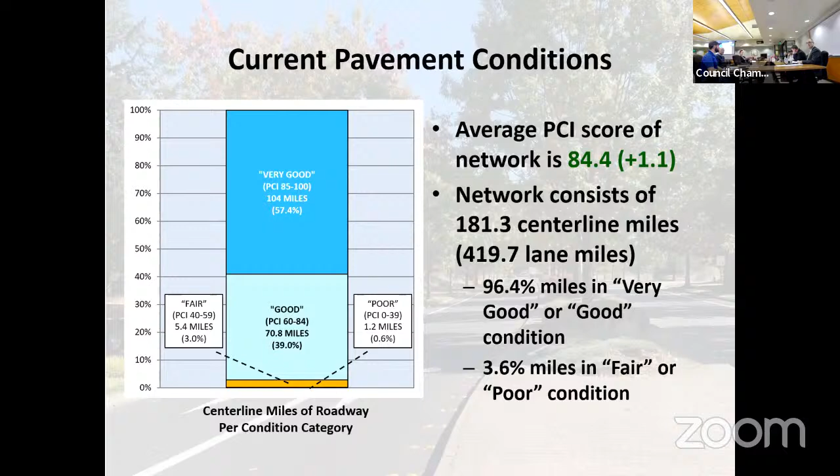Our network currently consists of 181.3 centerline miles, 419.7 lane miles. 96.4% of those miles are in very good or good condition, and then 3.6% of those miles are in fair or poor condition.

Here's a chart that shows our pavement condition over time. Generally, it's hovered between 83 and 84. So our funding, our treatments, our programs, adding to the network has buoyed it a lot, where we bring in these new neighborhoods and obviously they come in at 100. So all of these new streets buoy it, which also you have to maintain. So it brings that number up, but down the road it may end up bringing the number down if you don't adequately treat them or adequately fund your network.

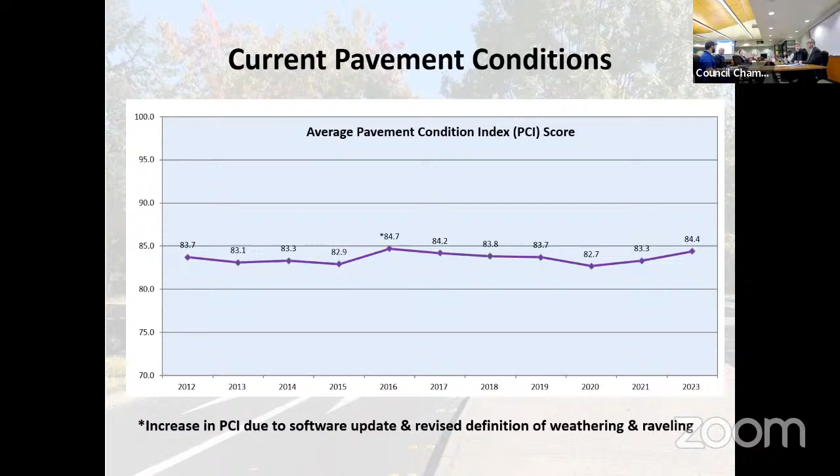Can you talk about the footnote here? Yeah, in 2016 we used a program - well, we used it forever, but Street Saver updated and combined raveling and weathering into one. In doing that, it separated out where the more you put into weathering, the less impact it had on PCI. When they were combined, if it had a little bit of weathering - which is considered a little bit less severe than raveling, where raveling is a lot of material loss, and weathering is just Mother Nature working at the fines on the surface - until you get to a high grade of weathering, it really doesn't have that much impact on your PCI. So it's just the split of that.

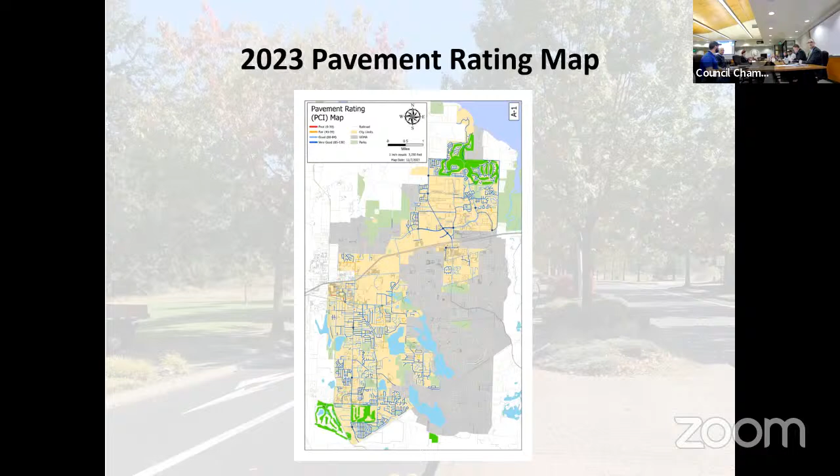Here's the map for the city. You can find it in the report itself on map A-1. The thing to note about the map is there's very minimal yellow and red in our network and a lot of blue, which is what you want to see. We see blue.

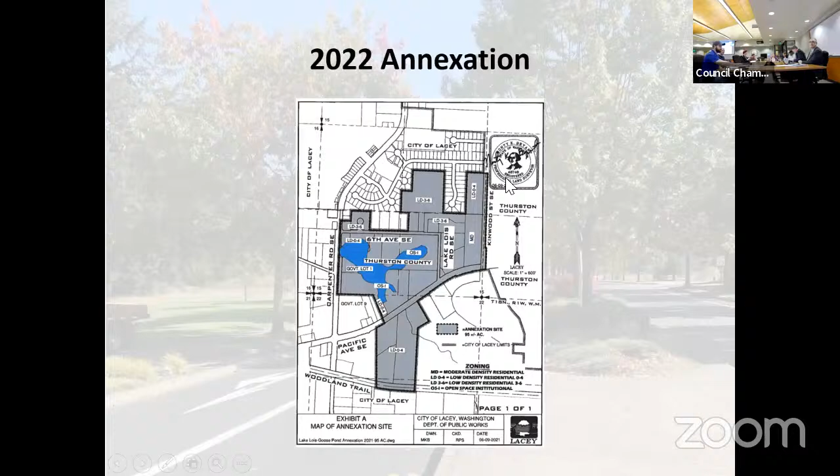For new additions, in 2022 we annexed an area near Lake Lois. In that, we added a chunk of Pacific Avenue, Carpenter Road, 6th Ave, Lake Lois, Kinwood Street, and a cul-de-sac. Kenneth, here's a breakdown of what we added: Carpenter and Pacific are arterials, Kinwood's a collector, and all the neighborhood streets are residentials. My PCI of what was added was a 77.9, and with this addition we added about 4.46 lane miles.

New developments are big in Lacey. They pop up every year, it feels like, which buoys our network, but could also be a concern 20, 25, 30 years down the road if we don't maintain them. There's Nisqually Place off of 31st, Bradley Park in between 15th and 6th Avenue, Sleater Kinney over here.

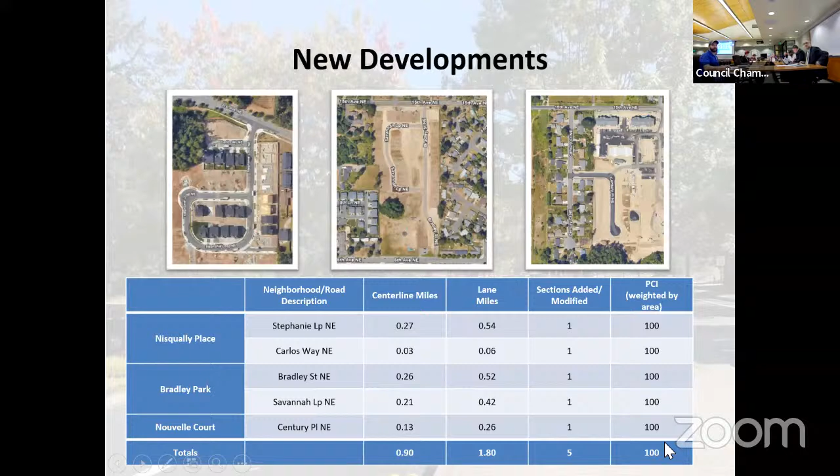And then Nouvelle Court off of 15th and Century. Century Place is our right of way. Obviously, with a new road, it's gonna be 100 PCI, and with this we added 1.80 lane miles.

This year I took some time to go through our network, went through all of our right of way, and compared if there was a street in our right of way that wasn't in the network. There was a chunk of Carpenter north of Britton Parkway that was ours but was never added to our network, and a court called Hilmes Court off of 32nd and Carpenter that was part of our network but just wasn't in Street Saver yet, so I made sure it was added.

So is it that part where when you get to Britton Parkway and you can go straight up that little mound and you kind of wonder what's back there?

It's weird because if you go on Britton Parkway to Carpenter, you go from city to county, then you take a right on Carpenter and you're still in the county, and then there's an isolated section of Carpenter that's ours. Once you get through that, it's county again - it's the area where Cuyo Park is on either side of. We're responsible for that chunk, but if we ever want to do any rehab of the project there, I'm sure we'll try to get the county involved, or they'll try to get us involved, just to make it a complete street.

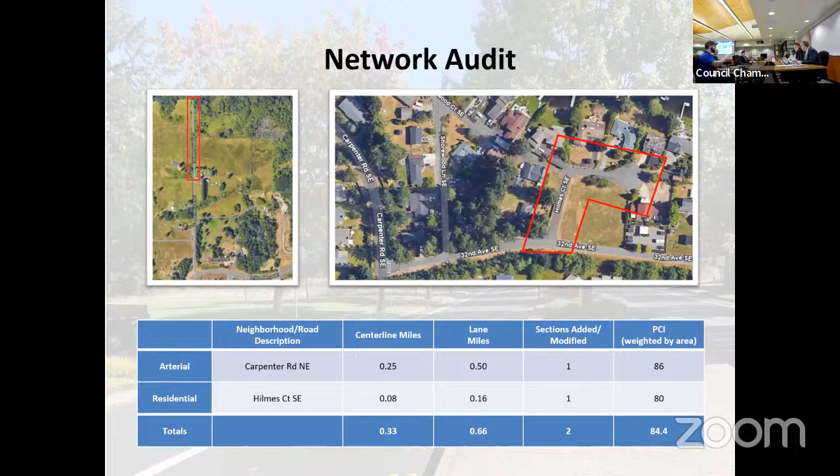What you're thinking about is on Britton Parkway before you get to Carpenter on the right - that's where the maintenance ends. How Carpenter's offset, where it's like tracking where the roundabout's gonna be, that's north of that residence. Correct, there's a City of Lacey facility back there - I think it's for the lift station. You can see that road, but you don't know what's back there - well, yeah, it's City of Lacey. So you go city, county, city. There's a couple spots like that - they're anomalies, but we have them.

Pretty good view there. Here's a map also in the report that shows all the new roads in summary. It shows the new road history, what was part of the original network when Lacey was incorporated, as well as a lot of date ranges. The ones in the red box are the ones that were added in 2022 and 2023.

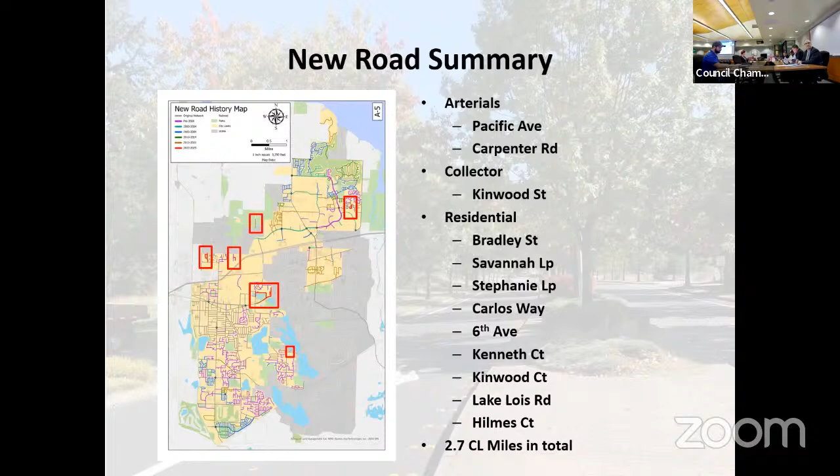We do road maintenance, especially with the TBD, where we want to upkeep our roads and keep them in good shape - it's cheaper to maintain good roads. When you have the funding levels to fix the bad roads as well, you want to mix those in, because once they get to a certain level they can become unsafe - missing pavement, missing chunks of pavement, poor striping, other factors where there's less slip friction on roads with exposed aggregate, or more slide to your car when roads have less of those fines, so we like to maintain them.

So when you do this work, let's say on Marvin, Galaxy, Quinault, Arbors, are you bringing the road back up to 100 or what are you bringing it to usually? A new road's always gonna be 100.

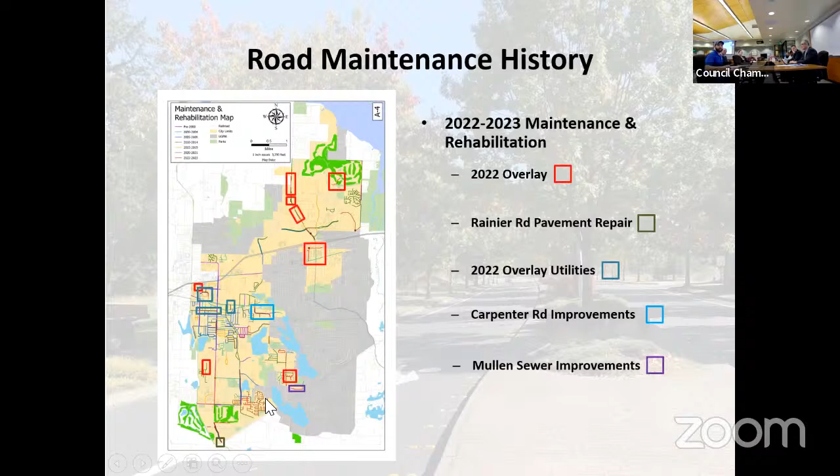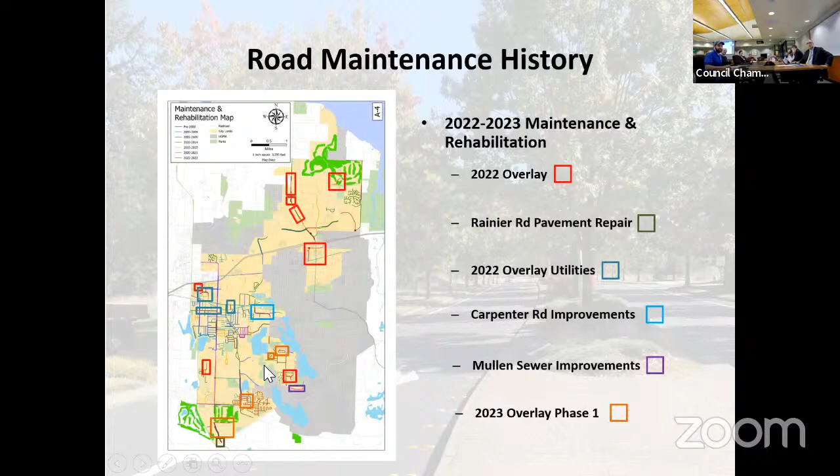2022 overlay utilities was 7th Avenue, Golf Club Place, Brown Street, as well as 14th. Carpenter Road improvements was the section of Carpenter, South Pacific, in front of the bus barn and through land. Mullen Road sewer improvements, the new county roundabout east to the train trestle, near the train trestle. 2023 overlay phase 1, you had Rainier Road, the roundabout 66th, Emerald Hills, section of 34th, and Carpenter Hills Loop. I'll go into each one of these in a little more detail here.

2022 overlay, we did 5.18 lane miles of improvements. We put down fiber reinforced HMA, generally resists early onset cracking, slightly more resilient. And we put down 11,800 tons, as well as new striping, pavement marking at a cost of about $2.5 million.

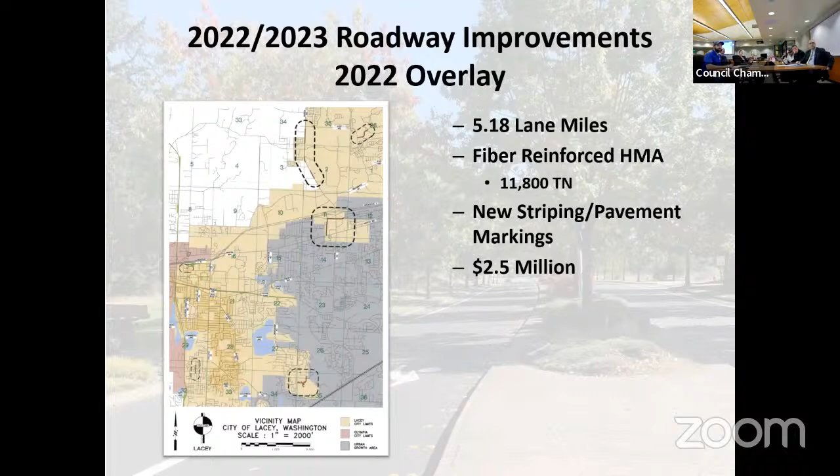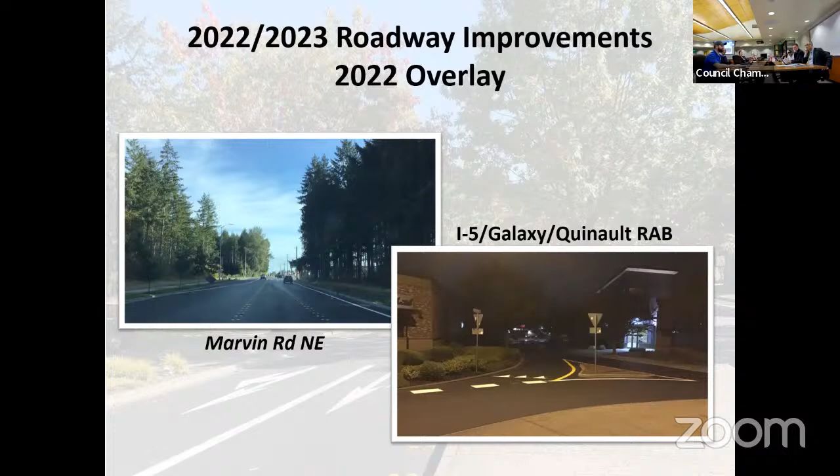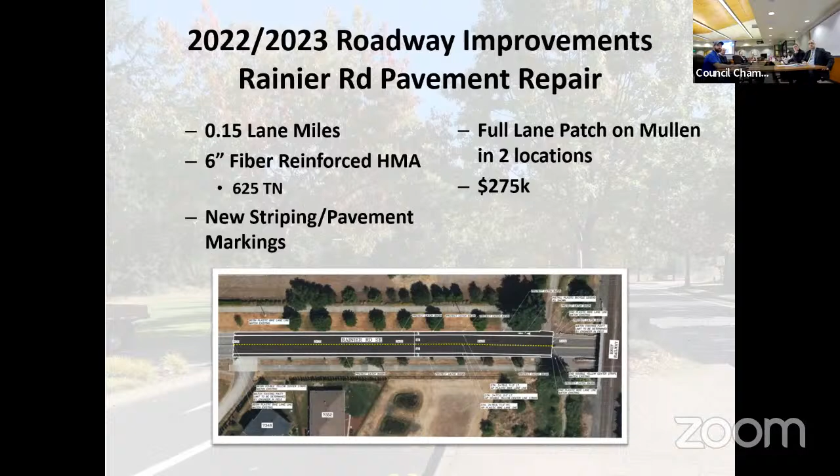Next up is the Rainier Road pavement repair. We did 0.15 lane miles. This was due to a weather event that damaged the road, flooded the street. We had delamination between 2 lifts of asphalt, started to come apart and crumble. You'll see some nice pictures after this actually. We did 6 inches of fiber reinforced HMA, 625 tons, new striping, pavement markings. In conjunction with this, we fixed 2 poor patches on Mullen, and this came in at $275,000.

So you added 6 inches to the road. We ground it all out and then put back 6 inches, end up about even then. Yeah, that's the goal, especially when you have curb to match to. Whatever you grind out, you have to put back because you have defined match points.

You want the water to... well, there's a little bit more going on where south of the trestle there's a watershed basin where when we get a lot of rain, unfortunately, it will come up this road and can and will do it again. It's complicated hydraulics. We made some modifications in 2009. It's only flooded like this twice in 16 years, but it's not a simple fix.

I was curious whether we could lift the level of the road to avoid future flooding, and I'm sure that's a rudimentary question, and the answer is probably no for a host of reasons. There's two main things. One is you have the railroad there, so if you raise the asphalt level, you get even less truck clearance under the trestle. The other thing is if you raise the level and push the water back further, you're causing flooding upstream at a greater extent than before.

We did some research into what type of base to put down underneath this road, because a lot of it is the hydrostatic pressure underneath where it pushes up, cracks it, does a lot of damage, you get a lot of delamination. So we reduced the amount of fines in our base course so it doesn't push against your road as much. But when the water table is at the bottom of your road, best practice might not be good enough, but we did everything we could.

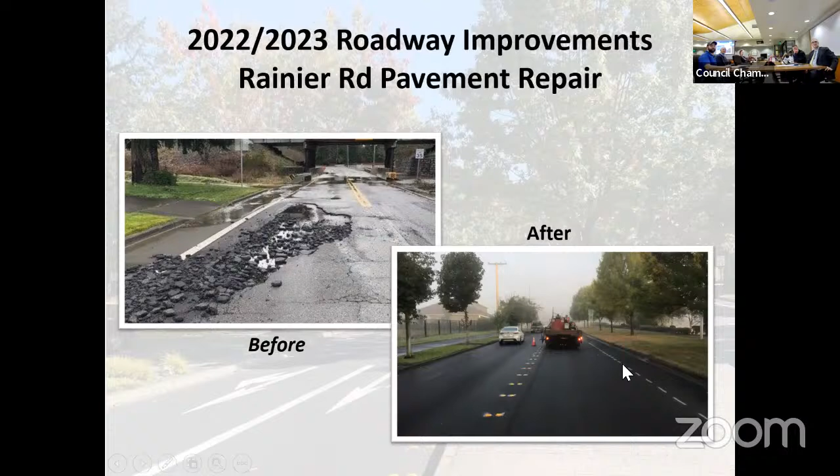And if you've seen it lately, it looks like a normal road again.

Next up is the 2022 overlay utilities. This was 2.17 lane miles. Once again, we put down 6 inches of fiber reinforced HMA, 7,500 tons, new striping, pavement markings. This one was in conjunction with the utility, so it was funded jointly between TBD dollars and utility dollars. There are water line improvements along all of these corridors.

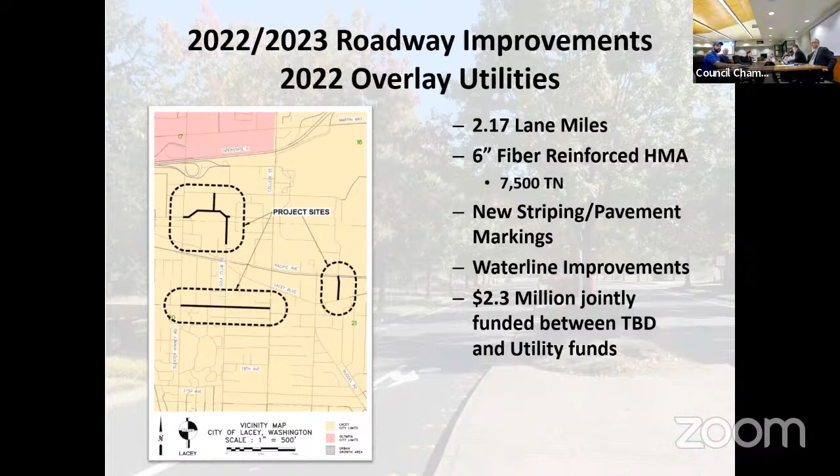We had special accommodations for them where we constructed in 2 stages in front of their driveway, so they always had access where if an emergency response vehicle needed to leave, they always could. So we were mindful of that.

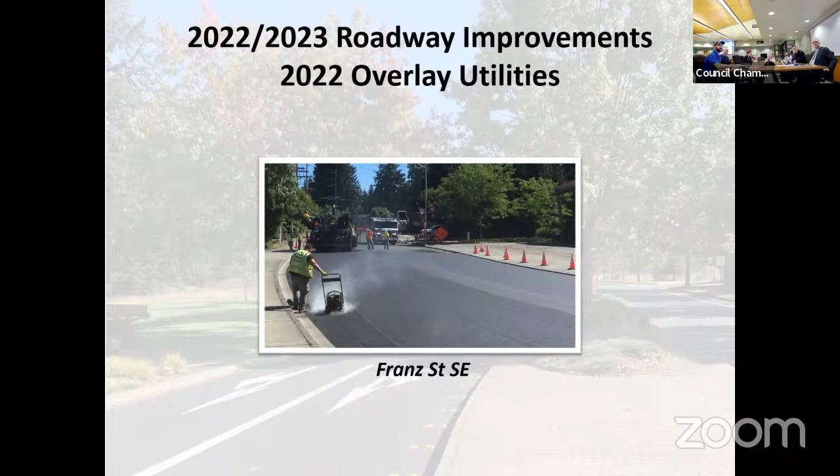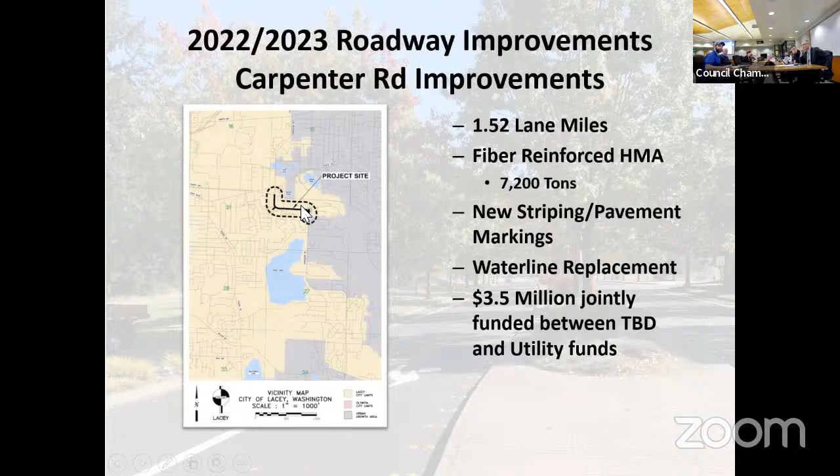Carpenter Road improvements is next, 1.52 lane miles, fiber reinforced mat again, 7,200 tons, new striping markings. This was also a water line replacement. We have a transmission main going through there, very large one. This was 3.5 million jointly funded between TBD and utilities.

The picture of the mat getting put down, and on the right is striping operations.

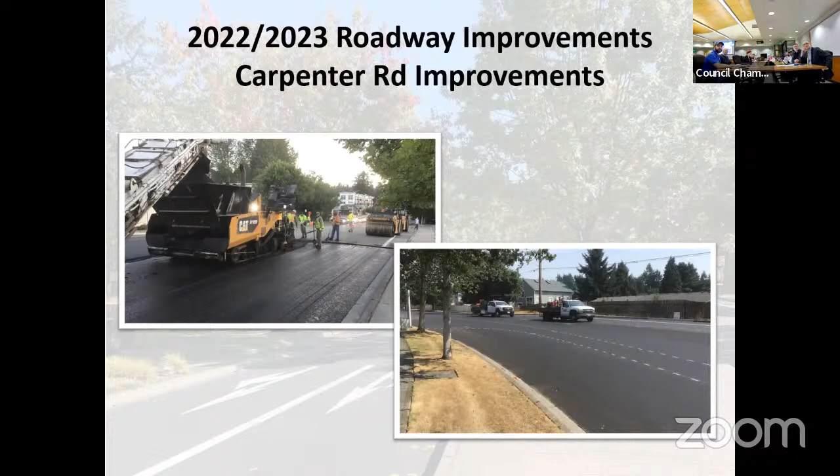Mullen Road sewer, 0.76 lane miles, 6 inches of fiber reinforced mat, 2,100 tons, new striping marking as always. This was a sewer line replacement, so it was funded jointly between our sewer utility and TBD.

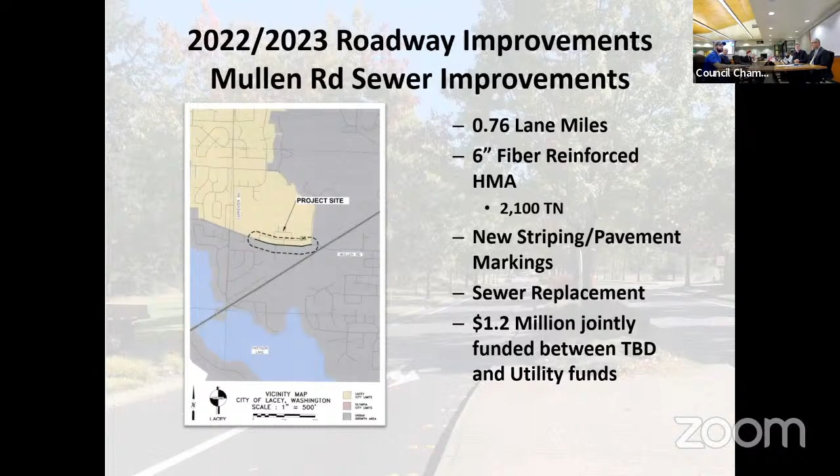On the right is during construction, on the left is the finished state.

Have we figured out - I know it's not our issue - but the flooding that happens right there as well? We probably can't control that one either. Whatever Mother Nature wants to do. I know it's a low point, water goes over the road all the time. They did something there that made that one better though. Yeah, it used to flood every time it rained.

Just like down on Rainier Road, the biggest challenge is that trestle. You have limited what you can do in there. Oh, that trestle gets hit all the time as it is. Yeah, and you can't widen that road.

When they connect, is our main going to be sized enough to handle all that? I'm sure it would be. Yeah, there is a sewer line that goes across there right now, but it doesn't have the capacity for this new development, so they're upsizing all that. That's a big new development, it's like several hundred homes, isn't it? Yes, yeah.

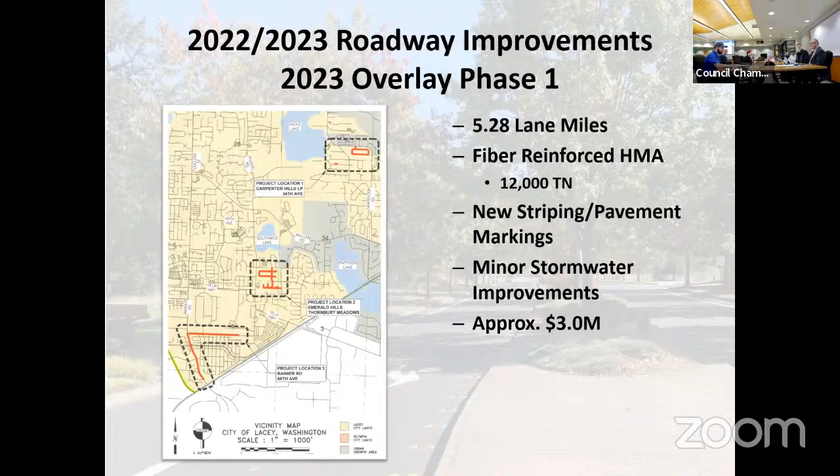So we must have been speeding too, for that to happen. Speaking of safety on 66, is there a potential diverter there, or is there still some action or work in place to bring the speed down on that road? I know that was an issue somebody had brought forward. I'm not 100% sure. The advocate for that went away, we weren't able to get a sponsor for it. So it's a long straight stretch of road sitting on a shelf right now.

People like to use - oh, excuse me - 66? Yeah, I'm sorry, I was thinking of the other one. Yes, oh, that one is moving forward. You were thinking the one in Thornbury, Lake Point-ish? Yes.

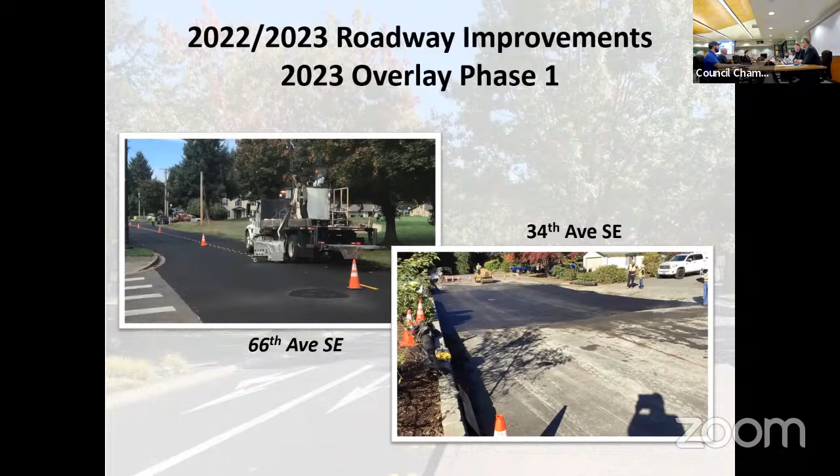Emerald Hills redid all the roads in that neighborhood, fixed the stormwater issue at a corner where it wasn't draining and it was damaging the roadway.

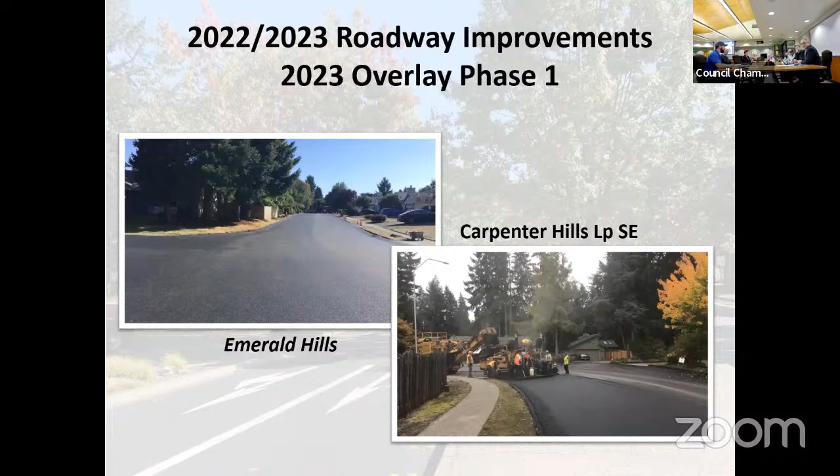Carpenter Hills Loop had a lot of organics in it. We went in there, had a lot of soft spots underneath the road, put down new base, fixed the road, should last a while. We implemented our crack seal program this year.

It's the pilot year. We coordinated it with our street maintenance department. They go out and give me a list of what they want to crack seal. We get done what we can with their funds, and then we contract out the rest. This ensures all the streets in need of crack seal aren't deferred.

It's cheaper to maintain good roads, and to keep roads good, you've got to keep the water out. Once water gets between lifts of roadway, it's generally bad, especially if there's only one lift and it gets into your base and softens it. Then you see elevated failures, like alligator cracking, which is usually a sign of base failure. Generally the only way to fix that is to dig it out, or redo the road if it's more widespread.

More sand? No, please. What? In the crack seal? Or more sand, I thought you meant sand under the road. Sand in the crack seal, right? It's a component, yes.

Is there a limit to how much sand you can put in there? It's generally a mix based on specification and use case. I'm not 100% sure the exact amount of sand in it, but different manufacturers make different products for different applications, where it'll have a different sand content versus asphaltic content versus whatever else goes into it.

I brought this up to Scott about crack sealing along Pacific Avenue on the one-way, between after the roundabout, like in front of St. Martin's University. All the crack sealing is going in a certain direction, and at a certain time, like at dusk, when the light hits it, you have no idea where the lane is. You think you're in the lane, then you look down and realize you're not, you're in the cracks, in this invisible crack seal lane instead. And when it rains too, it's tough.

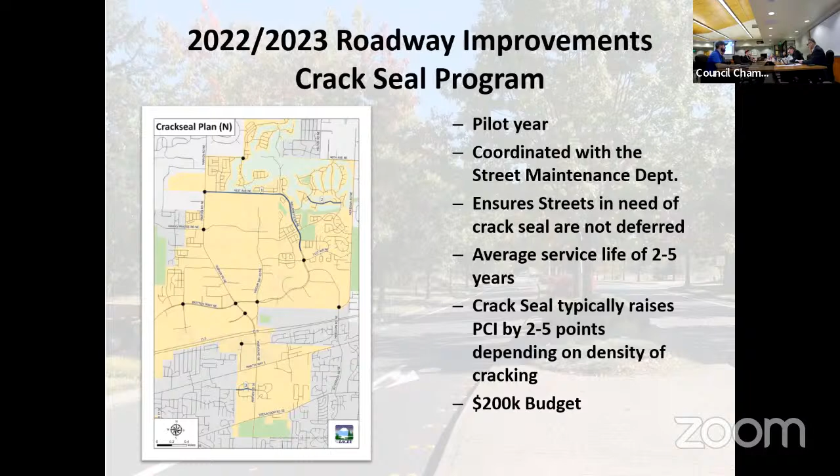Where we're seeing asphalt prices right now, they've dropped from the high of 120, which was crazy. I'd say on average probably like 105, 110 if you're looking for a big paver. It all depends on your size of job too—if you're under like 3,000 tons you can see higher numbers. If you send out one that's 500 tons per se, it wouldn't be shocking to see like 300 plus per ton, just because of place cost. At a certain point, the asphalt cost will control versus the cost of getting the equipment there and paying the laborers, so it's just a numbers game.

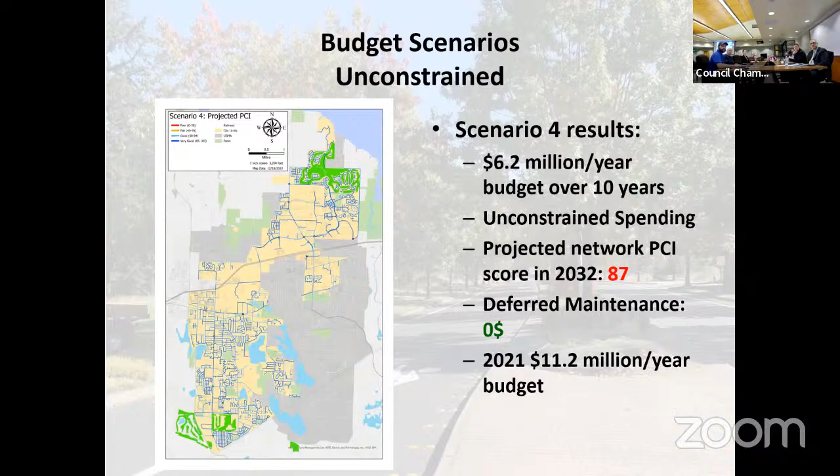Unconstrained, if we had unlimited budget and we wanted to keep every road in that light blue category or better, we'd need to spend $6.2 million a year. Our projected PCI would be 87, and obviously no money would be deferred.

In 2021, this was 11.2 million, which is obviously a lot more, but that was also part of the decision tree update, just knowing more about our network and knowing more about how StreetSaver works and how to gear it towards more modern techniques and what we can do to our streets to keep them in good shape.

More or less just double our budget on the streets, right? Yeah. I mean, it'd be nice to have an 87, but also we need to have people to design these projects and get all this stuff done.

So my question is, you can't get it even above an 87, even with unlimited funds? Yeah, because you've only got so many people to do the work. Exactly. This wouldn't bake in the amount of staff you would need or how many jobs you'd need to vet out to a consultant to get done.

Does an 84 put us in the realm of cities around the state? I'd say high end, probably like the top 2%. 1%? That's what I kind of thought. 2%. So 84 is probably a pretty good place to be.

So we'd be up there with Medina. I don't know, they might even be worse, I don't know, they're too busy building bigger homes than maintaining the roads. But yeah, like anything 75 and up, you'd be higher than most places.

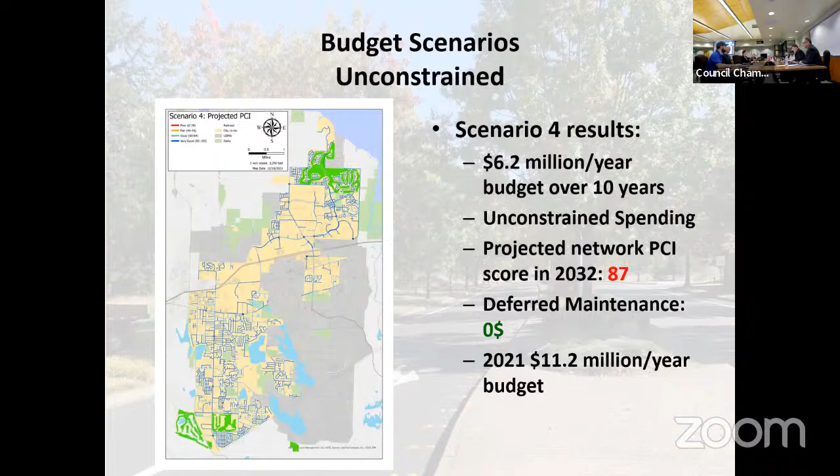And what's next? We have a lot of targets on our menu here for rehab projects. We have Yelm Highway down by the Trestle and Compton Boulevard.

The Lake Crest neighborhood, that would also be in conjunction with a water project. 33rd Ave, 33rd Loop, in conjunction with a water project. 36 would be in conjunction with a water project. Clearbrook.

There's some stormwater upgrades that need to be done there. That's been a target of ours for a while.

Willamette Drive, the portion between Hogum Bay and 31st, is starting to get in pretty rough shape. Now that the lift station is finished and out of the way, we can probably go in there and do some work and bring it up to a better level of service. Obviously, through the years, it's seen more and more traffic than before, so it's taken a beating.

30th Avenue, the LeMay garbage trucks have been demolishing that for years now. And the Classic Heights neighborhood.

For preventative maintenance, I'm planning on trying to get, well, the yearly crack seal program is something that's going to happen, but I'm planning on trying to get more preventive maintenance in terms of like a slurry seal or scrub seal or chip seal. It's something we do yearly based on a lot of our residential streets being on target for their first rehab cycle, where a lot of our streets were built between like 1990 and 2010.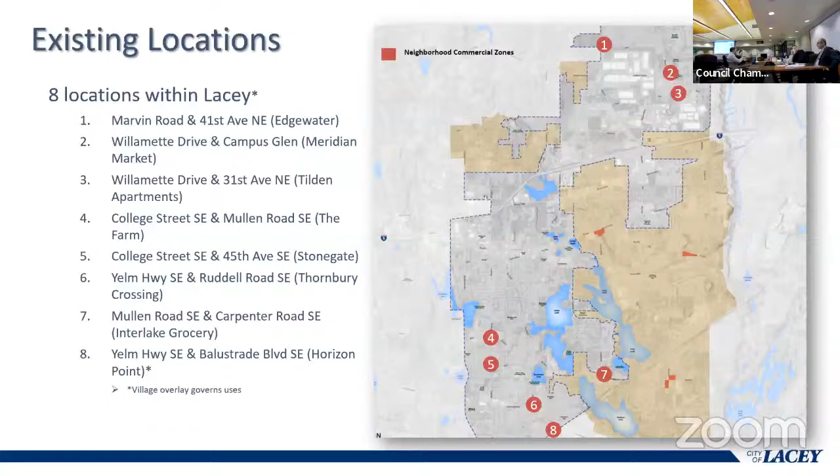So that's the map there. The rest of my presentation is broken into 3 different sections. One is a recap of everything we've done to date, just getting to the point that we're at today. The second 2 sections are a review of our code as it's written, and some recommendations on how it can be adapted, both from a design perspective and also a uses perspective.

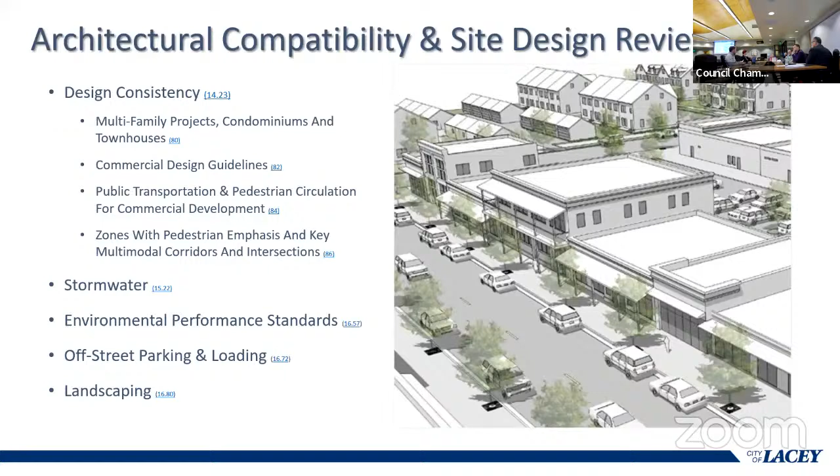It's important to factor these in because there are already quite a few regulations and design guidances out there that dictate the form to some degree. So this is just taking it a step further beyond what these are.

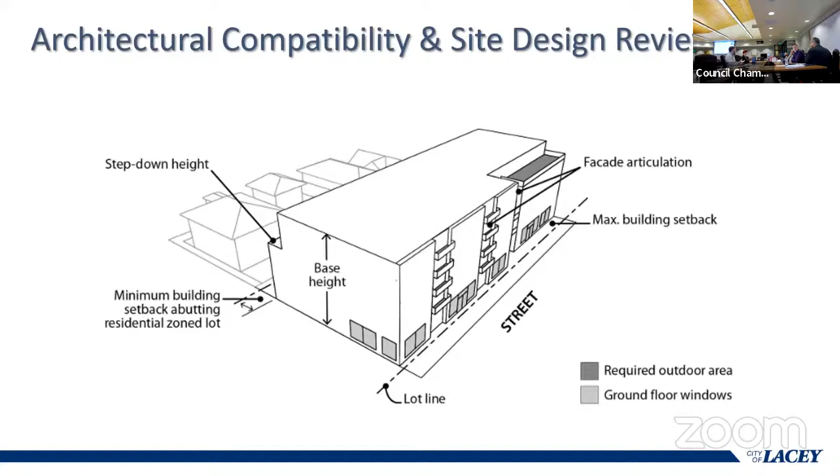And this is just a diagram to give you a better example of what we're talking about there. It has to do with things like minimum setbacks, number of windows, facade articulation, outdoor areas, ground floor windows, different elevations and step backs and things like that. So really when you put them all together, you get a building. And depending on the district you're in, that building can look a little bit different.

Currently within our code as it's written today, we have a max development coverage of 70%.

What that is, it's kind of a makeup of your buildings, your access roads, your parking - all the hard impervious surfaces. Comparatively, when looking at some of our other districts within our community, that's actually lower than both our moderate density and high density residential. So in practice, that translates to a relatively suburban style development.

What we heard both from the community and when looking at those example districts is that that's actually pretty low compared to a lot of those example districts folks are looking for. So right now, as our code is written, it requires a relatively suburban style, low density form of development. Our feedback was not that we want really high, but maybe something a little bit more in that middle range.

What's the recommendation? At least 80 is kind of where that was, that happy middle ground. We'll go into that a little more in a second. It's the blue squares in this diagram that you have here. The 75 gives you a close approximation, but a little bit more - sorry, it's the black squares here I'm talking about.

The other one in this site coverage section is max building coverage, and right now that's at 50%. So 50% of any site is typically allowed to be building as part of the way our code is written. The feedback we got is that's okay, but typically whatever's not building is parking lots, and parking lots are not terribly popular - it really does impact the character of a site when you have a lot of parking.

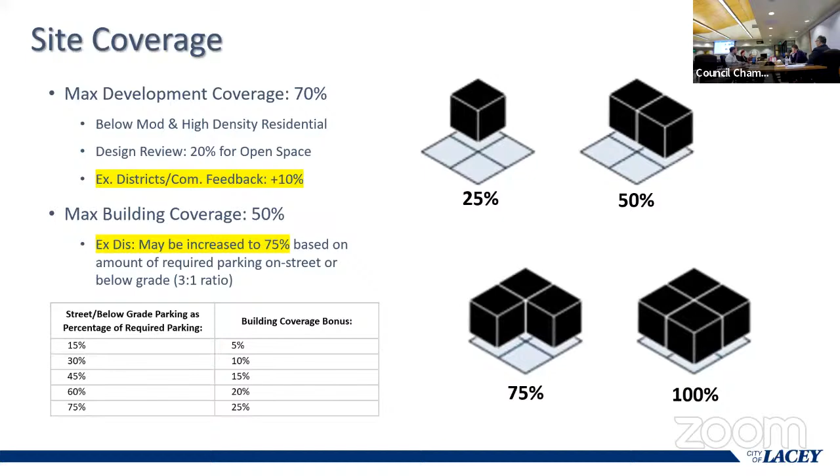I'll just say if there's interest in that parcel or property and it hasn't been developed in 20 years, you're losing business. Trust me.

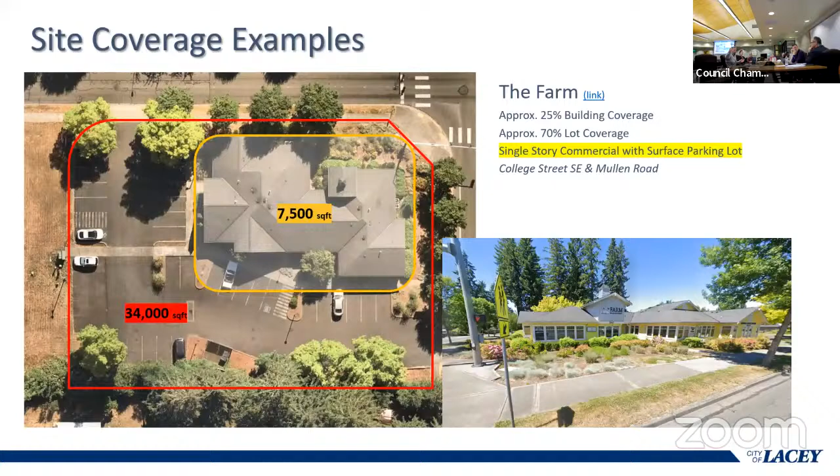So these are just a couple examples. I cut out a lot of these, but I just want to give you one quick one. So this is the farm, located on College Street and Mullen. It's an example of one of our neighborhood commercial districts, and in practice it's kind of different from what our code currently allows for. Our code allows up to 50% building coverage and I think 70% lot coverage, but right now what we're seeing is 25% building coverage and 70% lot coverage. And most of that is in the form of a parking lot.

And then as part of that outreach, we asked about example districts that folks liked. This is Briggs Taphouse. This was recently constructed. Given this is still below the targets that we're looking at, but it's closer to it and gives you an idea of what that looks like, and a comparison development.

So this is a multi-story building. It's closer to that 40% building coverage. Lot coverage is still pretty high, but there's also some outdoor seating, more activity going on outdoors and around that building that brings people to and from the street and creates that more of that energy that folks are looking for when we're talking about these districts.

I think it's a good example of neighborhood commercial because it has a recreational facility right next to it, a cafe across the street, and it's wrapped around with high density residential housing. They're building a bunch of apartments that are like a donut with that in the middle.

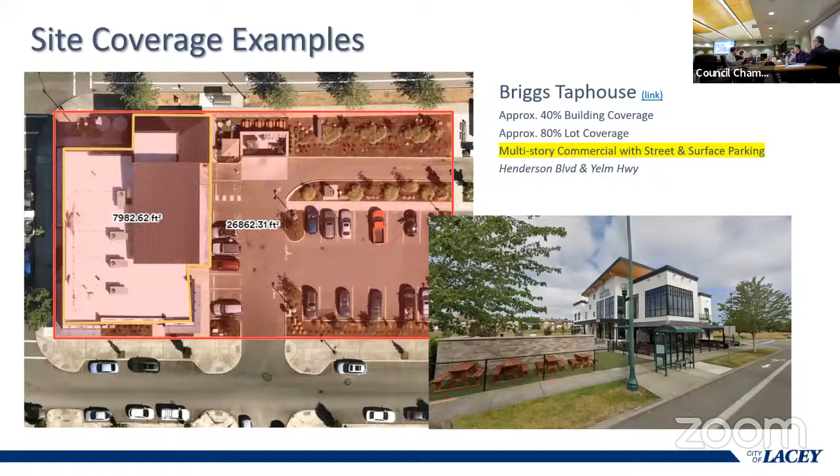And one of the things that we talk about is the need for a certain number of residential units to support these types of commercial spaces, which is something we've been running into with some of the districts that haven't been developed yet - they're kind of waiting for that residential number of units to meet that carrying capacity so that they can support these. That's the reason we've heard over the years why there is not a grocery store north of the highway.

Just to clarify about the Briggs project too, that was established in the 1992-94 comp plan, and it was a master plan village center type concept. So that whole area was master planned a long time ago, and it's taken a long time to develop and return to the market. Sometimes the market sets the vision and eventually you have the growth occur and the market develops and you start creating your design.

So that's a little bit different than a neighborhood commercial designation on an area that's not tied to a larger master plan. However, Meridian Campus are all master plans, and that's where you got your residential and commercial pieces in place. So I just want to put that clarification - there's some dynamics with some of these land use designations.

So then moving into gross floor area, we have two different maximum standards within our code as it's currently written today. One is for a single use, which is 10,000 square feet, and one is for a combination of uses or mixed use, which is 40,000 square feet. So that's what we have today.

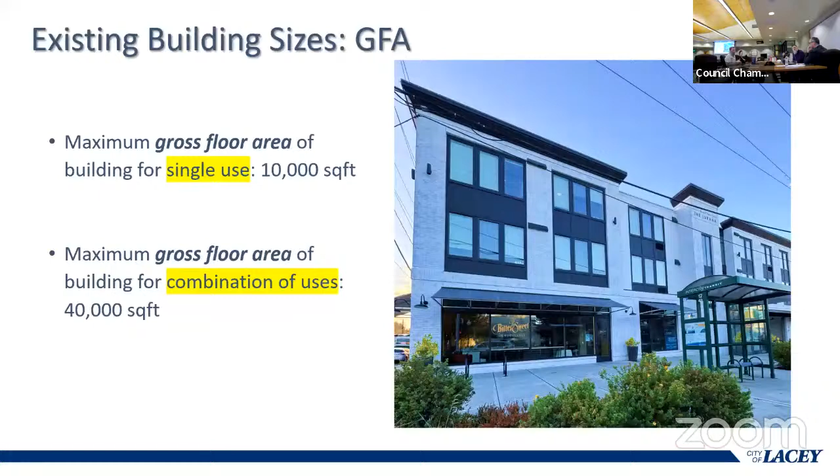What we heard as far as feedback goes is that folks are looking for something more granular. Our code as it's written isn't really responsive to a range of different uses that aren't quite captured in those two categories. There's actually I think 5 or 6 different subcategories that we heard a lot about that really aren't reflected within those two numbers. So one of which, looking at single uses, currently that's a 10,000 square foot limit.

What we heard is that based on the types of uses folks are looking for, with the caveat that grocery stores are different, everything else really is significantly smaller than that 10,000 square foot size building.

Is that the bakery in Olympia on San Francisco? Yep, that's the San Francisco Street Bakery. There's the Starbucks out on Yelm Highway right across from Briggs. There's this Mud Bay, which is a feed store and also a grooming store. In the corner of each one, I gave some ballpark square footages. By comparison, this preschool here is right around 10,000 square feet. I'm blanking on the name of that one. The new one. That's the AM PM, yep, exactly.

So generally speaking, what we heard is that single uses that are standalone, don't have anything else connected to them, smaller actually makes a whole lot more sense than that 10,000 square feet. With the caveat of grocery stores and preschools, which do need a little bit more space, but most of the other types of uses, bakeries, cafes, restaurants, whatever, all fall pretty well within a smaller footprint than that 10,000 square foot. So is that something you're thinking about changing in this?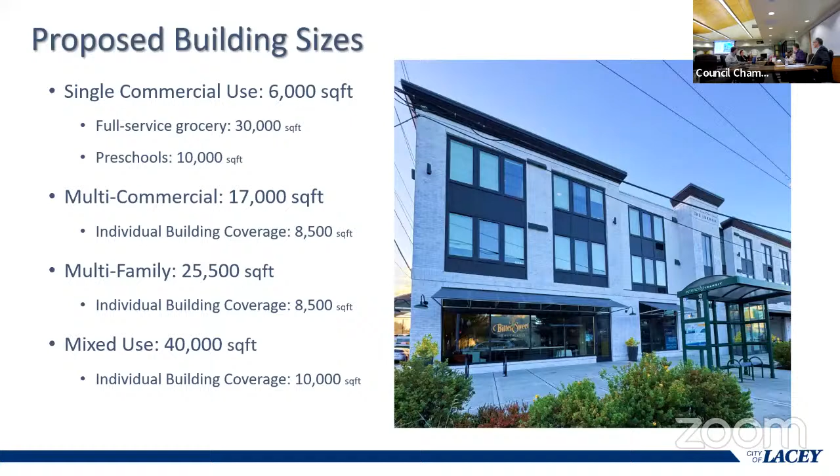There is a lot of room in a lot of these districts to accommodate a lot of combinations of these uses. Does this sound like we're going in the right direction? Yes, okay. We also looked at building heights.

Currently it's 35 feet. By comparison, moderate density is 40, and high density residential is up to 80. I'm not going to talk much about high density residential, but 35 feet is comparatively on that lower density, more suburban style of development, and that's what we're seeing in practice.

What's the height on the Reserve? I believe it's 75, or maybe 70 - I think that's the height allowance, under 80. How many stories is that? It's four - they took a story off. Should have been five, but they got into trouble with interest rates.

If we were to allow 80, does that present more opportunity for developers - a six-story building on 6th Street? I would push back on 80 a little bit. I think this is still our lowest intensity form of commercial designation within the city - there's a range of different commercial district types, and this is meant to be the least intense. Four stories seems like it would fit really well there.

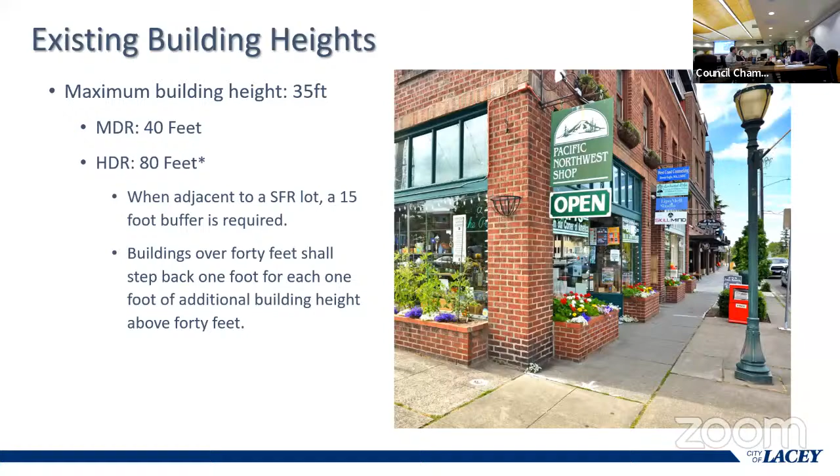You see a ton of mixed use - first floor retail, three stories above it - that's the common building we're seeing right now in more urban areas. That wouldn't work on Willamette Drive, but it might work on 41st. With a 35-foot height limit, realistically best case you're going to see a 2-story building.

That's still relatively small, kind of single-family style scale honestly, so some of the recommendations we're looking at is bumping that up to 40 feet, which would accommodate a 3-story building, with the opportunity to increase to 55 feet provided the top two stories are residential.

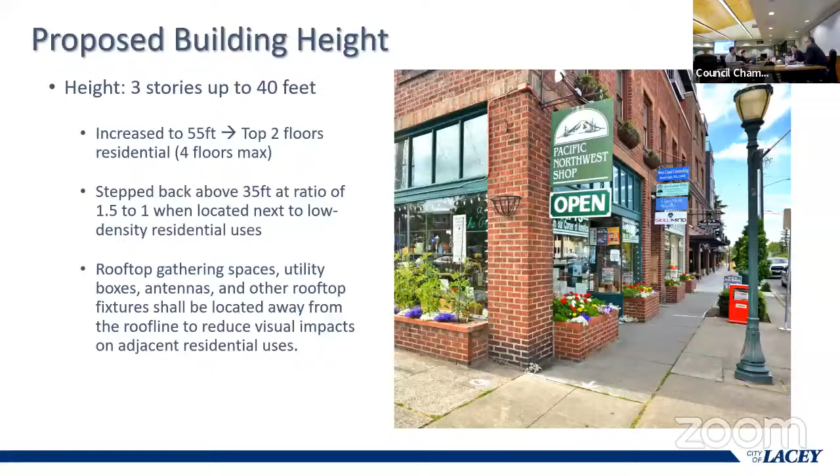There are additional requirements when these buildings are located immediately adjacent to single-family residential - additional buffering, setbacks, step backs, things like that to soften that interaction. We want to be mindful that these are neighborhood style commercial developments, so there are some additional ideas as far as how to soften that while still encouraging additional height, and that additional floor for ground floor commercial with residential above it. That's the direction we're going.

I like it - I'm not saying I like it just because it's 8:30, I'm just saying I like it, period.

Proposed frontage changes, this is the last part of really the design element side of things. A lot of this is pulled from our woodland districts, and really gets into the character a little bit more.

It has to do with weather protection, so awnings, things like that, and uniformity in design and character. It has to do with windows and how much of the store frontage is made up of windows, and being oriented towards the street. Then primary entry doors being oriented again towards the sidewalk, towards the street, not towards a potential parking lot in the back. So maybe making sure that there's really that forward facing street connection is really what all this is about.

And then permitted uses - I did want to throw this in really quick. This is some of the feedback that we heard early on, exploring the differences between north and south of I-5 specifically, and whether there are really dramatic differences between the neighborhood commercial districts north versus south of I-5. Looking at the feedback we got, we did ask some location specific questions, so we were able to sort based on where that feedback was coming from.

Themes that had kind of a northern polarity, more commonly featured from people living north of I-5, included things like grocery stores, gas stations, Meridian Market specifically, because there's a lot of feedback that came in from directly around that location. And then trucks and that modal conflict. A lot of that, honestly, when we were looking at the larger feedback, had to do with the warehouses out there, not necessarily feedback specific to neighborhood commercial districts, but it was feedback we heard more consistently from folks north of I-5 than south.

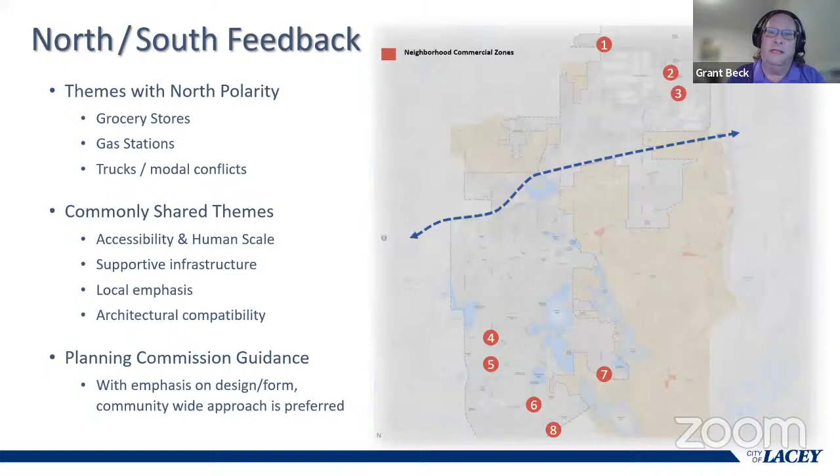I was gonna say, Nick, what you just brought up made a lot of sense. So if you did it kind of broad stroke like you're talking about, right? Because it gets pretty complicated if we're doing completely different for each of them. I get that. But you could then go in and say not allowed uses, or allowed in specific ones, right? You could say this is the basic code, but in one -- that one we label as one -- gas station as an example, and not necessarily have that as a distinguishing factor in 8.

And there is an example of that too, referring to the Martin Way corridor. You have the west, central, and east, and each one of those has a different emphasis based on the existing situation. Yeah, I was thinking north, south, and central. Because the central is more auto oriented, and west and east have a little bit different scale.

As long as we're heading in that direction, I'm okay with it. I think it's better that we look at each district on its own, and then come up with what fits there and what doesn't fit there. But we know for a fact we shouldn't put any more gas stations in 2 and 3, right? Well, I think 1, 2, and 3 are all kind of one district.

So we do have Councilmember Vasquez -- it sounds like we're maybe going in the direction of not creating specific definitions for every single one, but rather identifying prohibited uses in some. So the last section we have is our uses, and gas stations is one of them. I'll show you what I did there, because that might actually address a lot of what we're talking about right now.

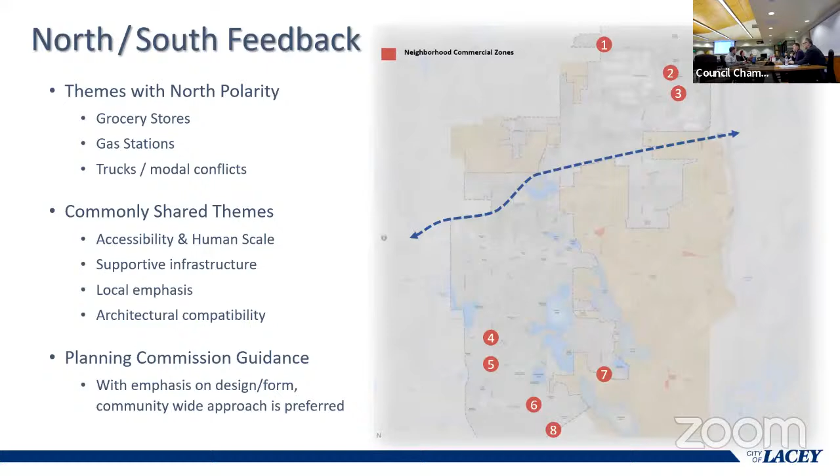On a high level, real quickly though, from the design stuff we talked about so far, does that seem to make sense? Absolutely, absolutely, across all districts? That looks great. Okay, so design standards are perfect.

Moving into specifically allowed uses, we're moving away from trying to name and anticipate every single type of use that might come along, including film development and video rental stores, which are still in our code today -- another Blockbuster -- and doing more umbrella categories. So instead of trying to list everything, listing residential as an allowed use, and then we do have a couple potential caveats underneath that.

So right now, as our code's written, residential above ground floor commercial is the only scenario where residential is currently permitted. Taking a step back from that, looking at potentially allowing it on the ground floor with the caveat that there's at least 1,500 square feet of commercial space. So really the intent is, yes, we want more residential, but we also want it to support the primary intent of these districts specifically, which is commercial.

So finding a way to allow those types of ground floor uses, provided that they're still meeting that baseline requirement for commercial development. The additional benefit is that these can locate around the periphery of these districts and soften that transition from commercial to residential zones.

And then circling back around to live-work, we did want to encourage that. It should be able to accomplish some of that required minimum commercial space, but we don't want it to be entirely that. We still want some anchor style tenants, maybe some larger ones, and then along the edge maybe some of those smaller individual boxes. So that's kind of where we were circling with for residential.

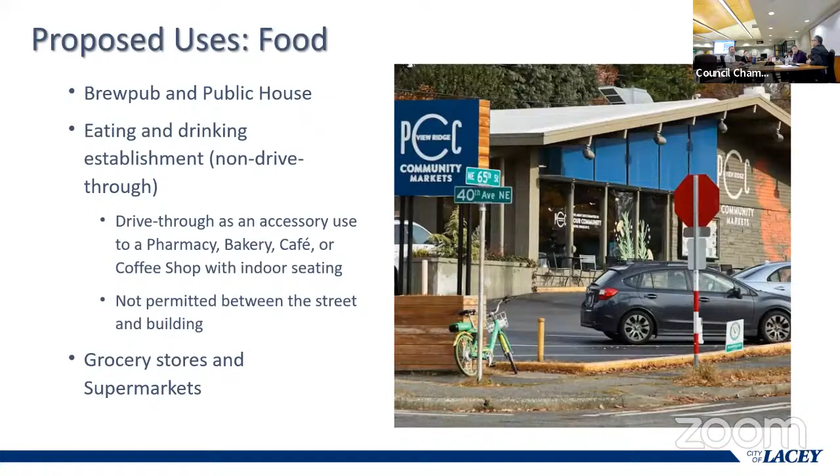They're everywhere. And the additional element here is drive-throughs are not permitted between the street and the building, so when a drive-through does take place, it's located on the side or on the back, so that street-building interaction is still encouraged. Kind of like we see with Serenity? Yeah, around the back of the pharmacy, around the back.

And then the last one is gas stations. There are kind of two different schools of thought here. We don't want to outright prohibit existing uses that are already there today, so finding that balance of allowing what's already currently there, but maybe not encouraging it moving forward. There's two different ways to approach that.

Gasoline fueling stations as an accessory use to a full service grocery store - provided a grocery store goes in, the feedback we've heard seems to still be amenable to a gas station, provided they get that grocery store. I think the grocery store does outweigh the gas station balance - priority for a grocery store outweighs the negative perceptions of a gas station.

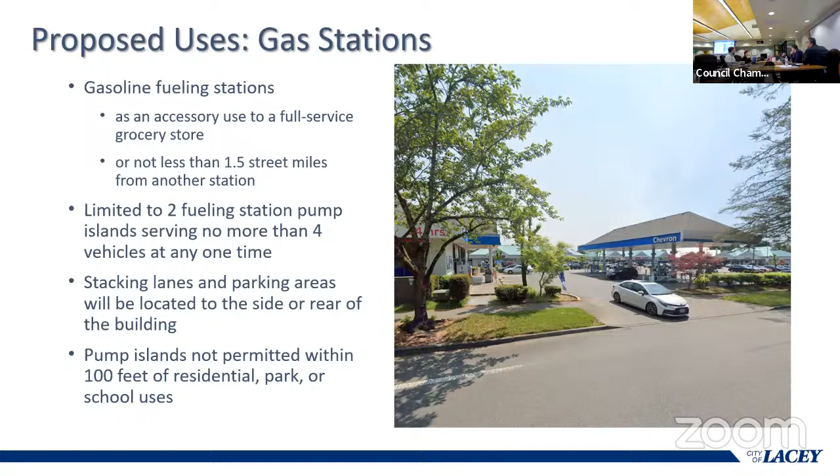Well, I think we're heading in the right direction. Okay, got more slides? One more, this is it.

So we either have permitted or prohibited, but no gray area in the middle. I think that's fine. Thank you.

I'll just wrap up real quick. Thank you, Hans, good job, great conversation. As you can tell, there's been a lot of work that's gone into this point. We're only three-quarters of the way through the process.

So the next step is to go back out to the planning commission, I believe tomorrow night. They meet on Wednesdays now. That's kind of weird to get used to.

So they're gonna start that process and bring back a recommendation to the council. One thing I want to follow up on is Councilmember Dunning's question about who makes these decisions. We can go into it a little more in a future meeting, but as a quick summary: once this recommendation comes forward, it'll be adopted into the neighborhood commercial zoning chapter. And as Hans mentioned early in his presentation, we have other codes that relate to land use development, like design review.